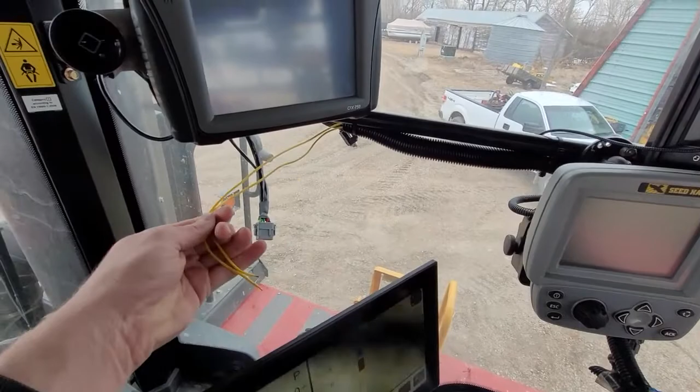Got a little bit ahead of myself - I jumped in before I started filming, but haven't really changed much. All I did was run essentially 20 gauge, 18 gauge wires through my umbilical, and they're going to spit out this side.

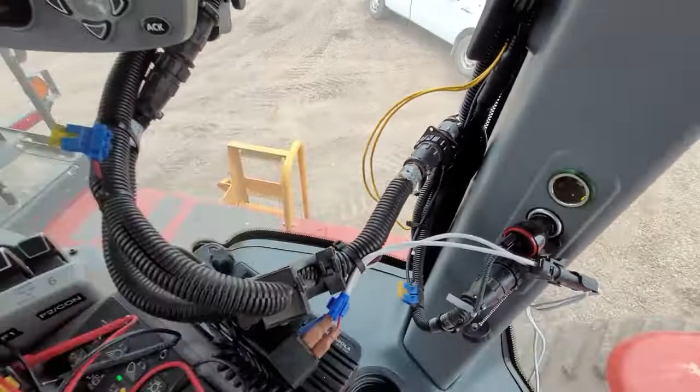And I tested this relay. So this cord off of our loop controller is SH number 322702. That's the cord. I'm guessing all of them have this relay. And what you need to know is I can't go direct off the relay because it sends signal back.

But I tied into the powers on this relay, and if I turn it on, so this is hot, this is cold, or vice versa, I can't remember.

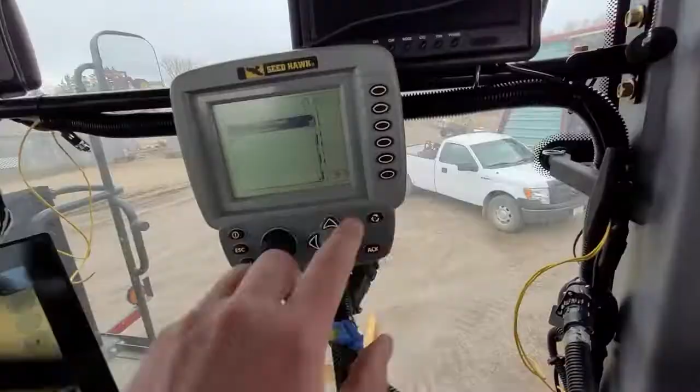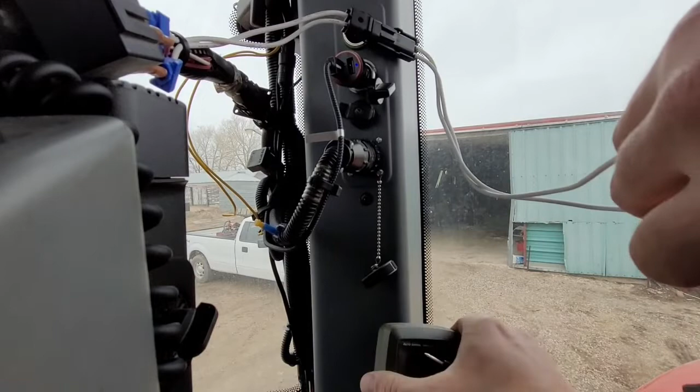But what I will show you, let's see if I can find a spot to mount my camera. It's not going to find any sensors right now, so that tells you whether the clutches are enabled or not. So as it stands right now, the clutch is off, and these two have no power. Let's see if I can put that where you can see that too.

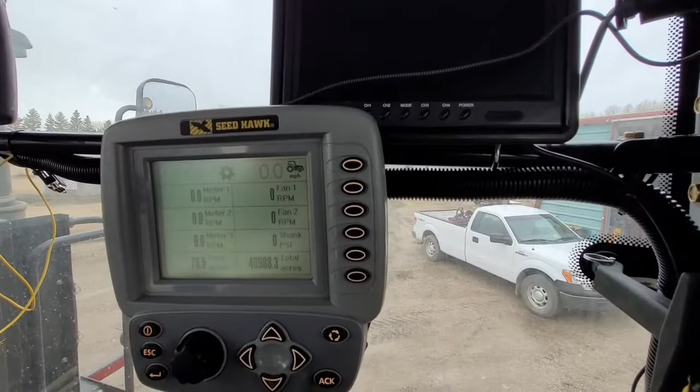Stay. And these two will have voltage across them. Don't really care which way it goes. You can see 11.15 volts across. Don't really care if it's positive or negative, just I need it to act like a switch. So it does. Turn that off, turn that off.

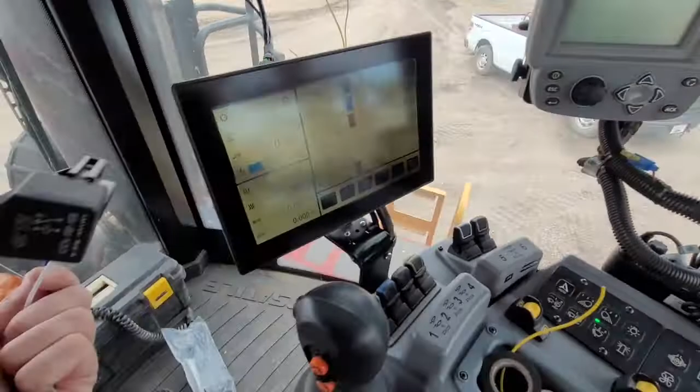Cool, so now we're going to run - I need to have a break right there, so I wired in this little quick connect. It's going to run all the way to the other end, where it's going to plug into this relay, which will act as a button.

So just showing you a quick little run. It's going to go up there and connect, but I just took the extension out, and I just wanted to make sure that this relay was rigged in correctly.

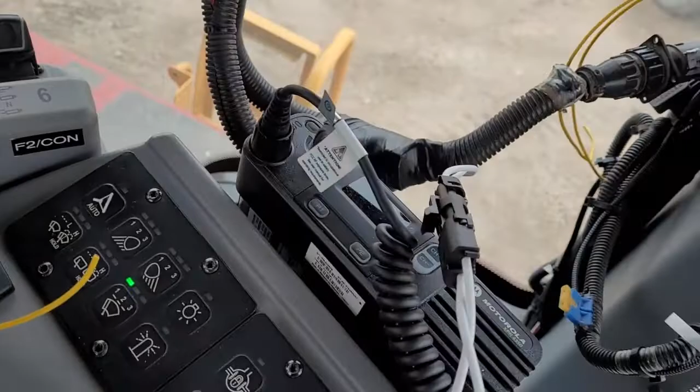So I've got my power going to the two sides - sorry, these two sides, the white and the black. So power coming from the other umbilical. And as you can see, the clutch is off right now.

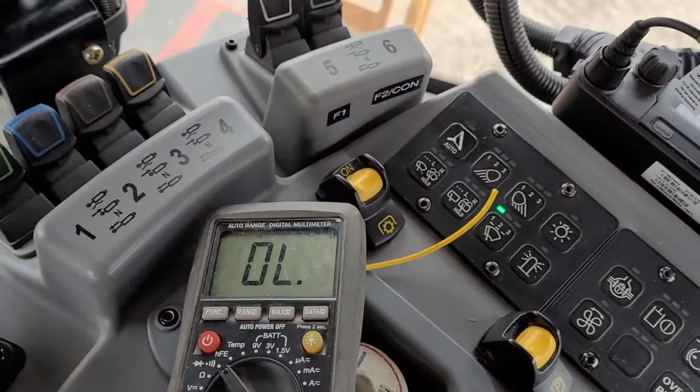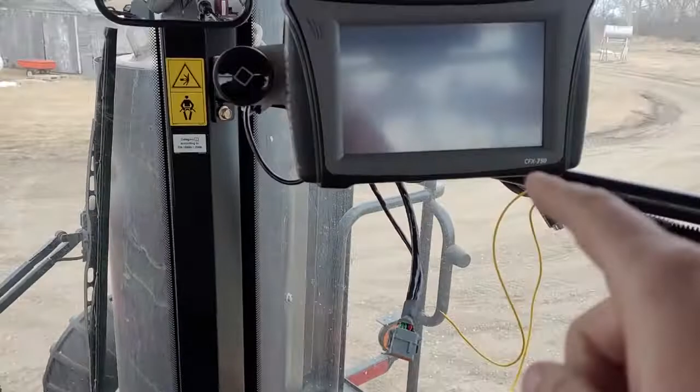So I've got my multimeter on continuity, and then if I hit and engage my clutches, my multimeter starts speaking to me. So that's essentially like I'm pressing a button down, which is what's going to make that guy paint, which is going to make the climate field view log data.

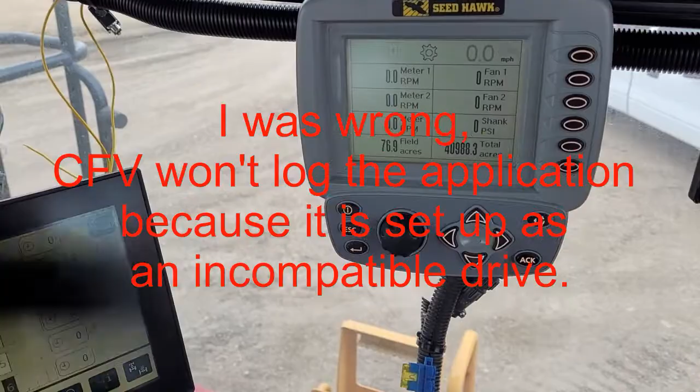Perfect. So on the A side, or A port of our CFX 750, we had a single wire going in. I'm not 100% sure what it is or what it controls, but if you can see, it's on number 2.

And these Deutsch connectors are actually super easy to undo. So you go to the input side, it normally sits in, and all you got to do is put a pair of needle nose in and just yank that out. And then you will see, I've actually got this one open.

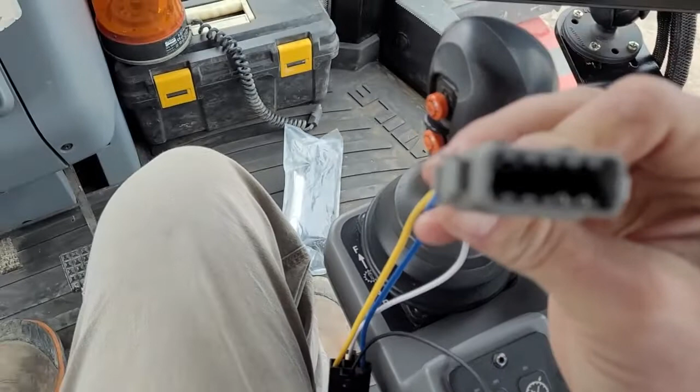Where are we? This is my new add-on that I'm going to have to program. Come on, focus - really hard working with one hand here.

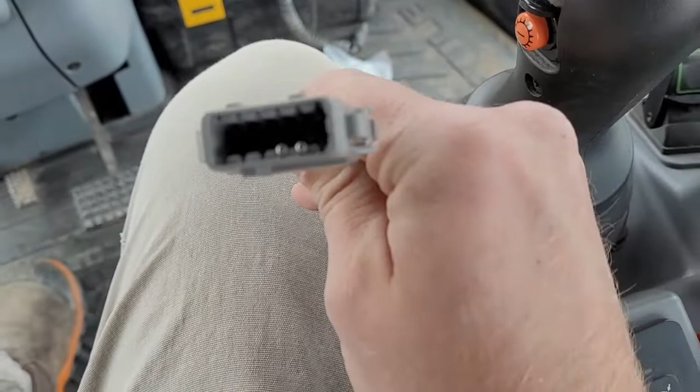But all you got to do is reach in there with a small screwdriver and pry open a tab, then pull on the wire, and it pops out like nothing. And to put it in, all you got to do is make sure you get a little bit of angle on those pins when you slide them in, and push them in until they click.

I'm lucky because I had this made for me beforehand. Otherwise, you need a special crimping tool for these Deutsch connectors.

All right, so we're out here, I'm testing some. I just set up a fake implement, obviously not towing anything, just to make sure that I didn't plug anything into the GPS incorrectly. Now, the one thing, suddenly, I don't know why, it may have been tweaking a feature or something that I don't remember in the fall when I was pulling the disc.

Is that it's not painting yellow when the auto steer is engaged. So I think I may have turned that off, which is fine. So everything's working. So now I'm going to go into the next step, which is to set up my virtual switch.

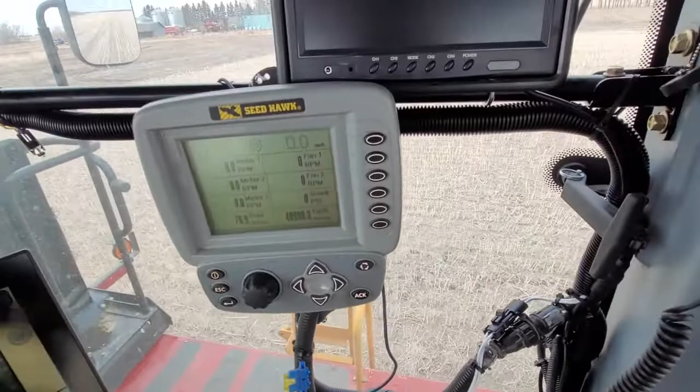Which is connected to the Seed Hawk loop controller. I'm going to turn around. And what I want it to do is to paint yellow when I'm applying product.

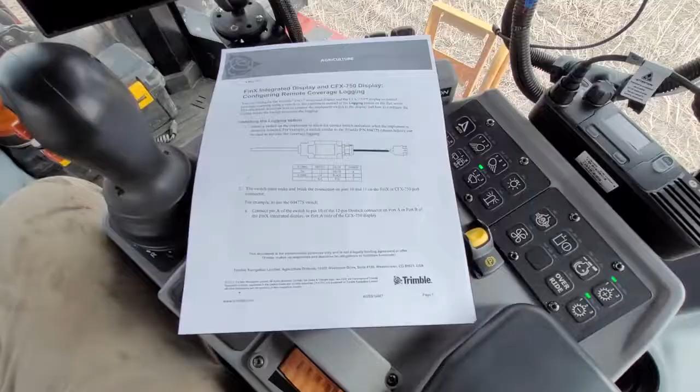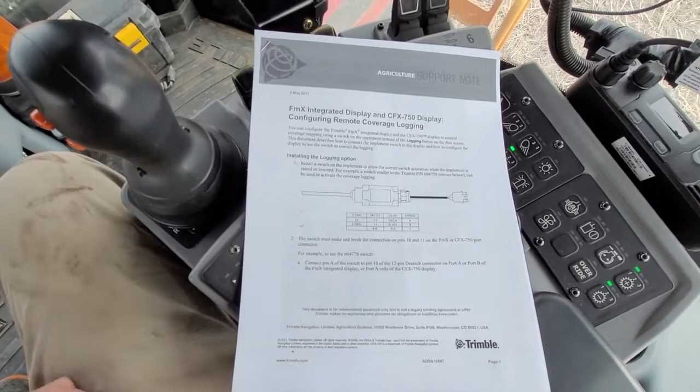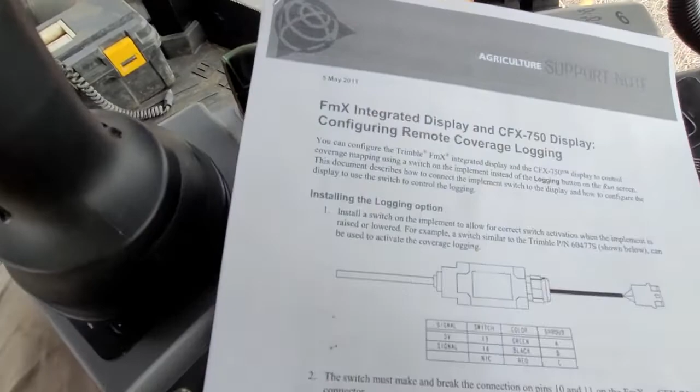Air quotes. So Zach from Canada West Harvest Center in Saskatoon, he's one of the Trimble tech support guys for Canada - at least that's where their website directed me. And he told me what I need to do, and he sent me this printout. So we're going to do the setup according to this. And this is actually a bulletin.

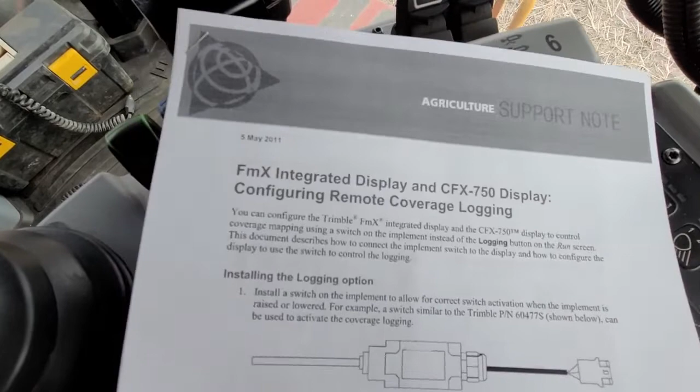It's not in the manual, but it is a May 5th ag support note: FMX integrated display and CFX display configuring remote coverage logging. So if you're looking for this, that's probably what you're going to have to Google or search for on the Trimble site.

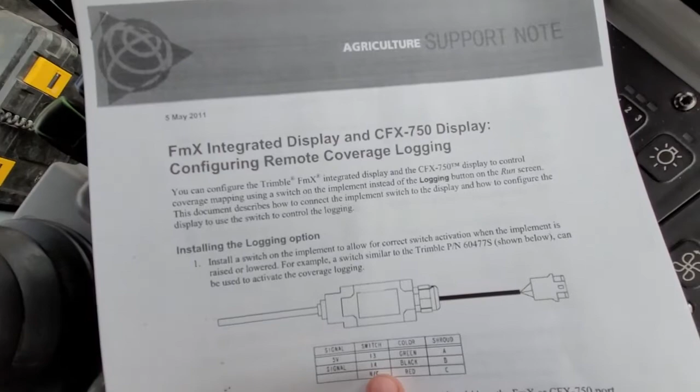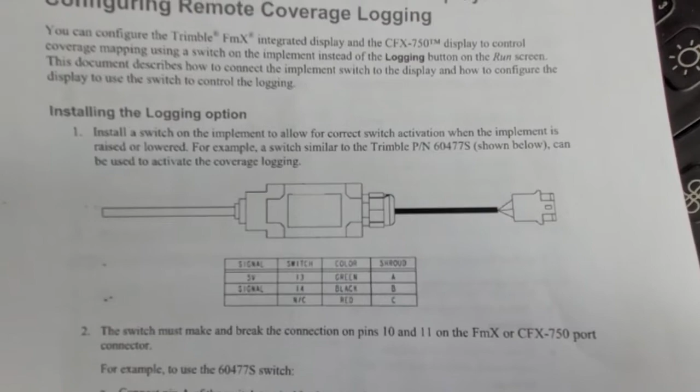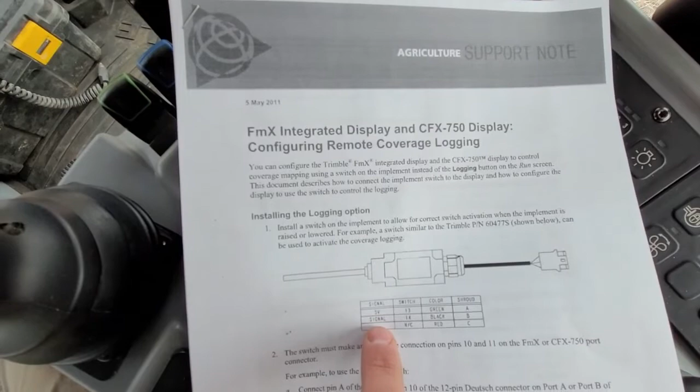First step, install a switch. One thing that kind of worries me is it shows this one in particular - a Trimble 60477S. I don't know what that is, I don't have that switch. But the one thing I saw is it's got a 5 volt and a signal and a blank. I'm hoping that it doesn't need voltage.

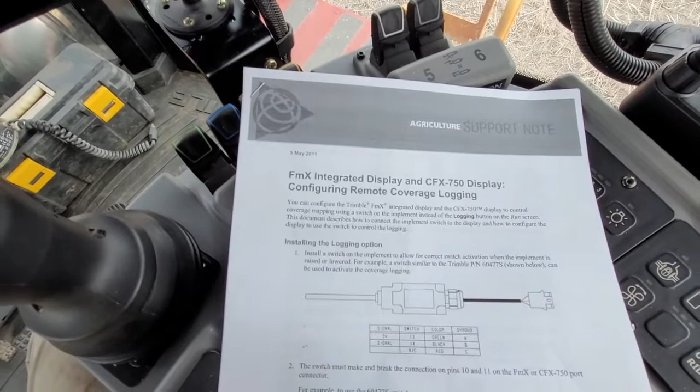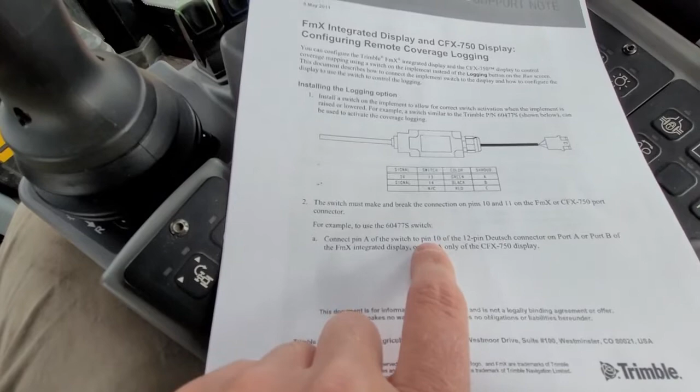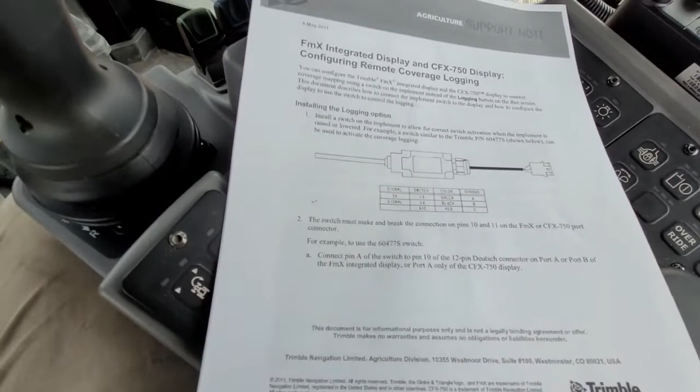It shouldn't need it to operate as a switch. But what I've done is connected pin A of the switch - well, I don't know, and that's where it gets questionable. I have mine in pins 10 and 11 like it says here, but I don't have voltage, mine is just a continuity. So let's see what happens. It's hooked up exactly as I said here. I'm really hoping this works.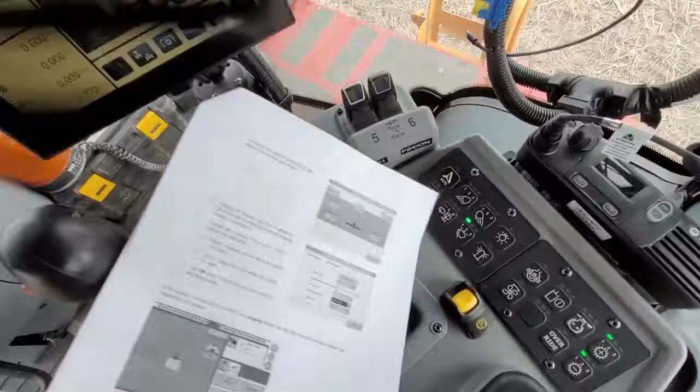So configuring the FMX integrated display - I don't have that, I'm guessing they're the same. Oh, nope, there's one on the back here. Configuring the CFX 750: tap the wrench icon, in settings tap guidance, tap coverage settings, coverage logging, go to - I think it says - tap switch.

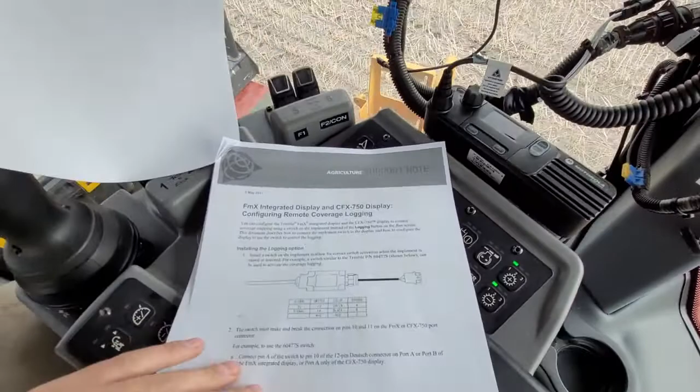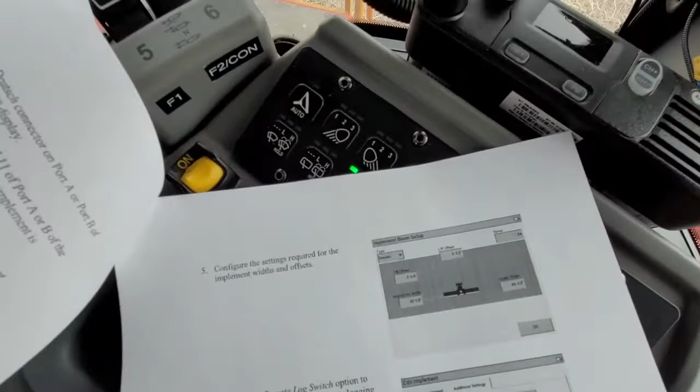I don't have a delay in there, I might have to put a delay in. I probably will, that might be tricky. But on the final page of the FMX, I recall it saying the high and the low, so change logging when selected - so active, let's read this out. High: logging occurs when the circuit is closed, and I think that's what the case is going to be the way I've got it set up. So I'm going to change that to active high, and we'll see what happens. And then we'll back out. Let's cross our fingers and hope I did this right.

First of all, let's get on our line - I was on this line before. This one over on the blue, or now it's our selected line. So first things first, we are not logging when the auto steer is on, which is perfect.

Now, cross our fingers, I'm going to fire up the clutch, or simulate that. And if you can see, it is working. That's awesome. Now I'm gonna go offline and make sure it's still applying. It sure looks like it. I've got just a fake implement set up, and I put a long drawbar on just because, but it sure seems to be working. I'm gonna catch another line here just in case it wants to shut itself off, but I think we've got everything going here, guys.

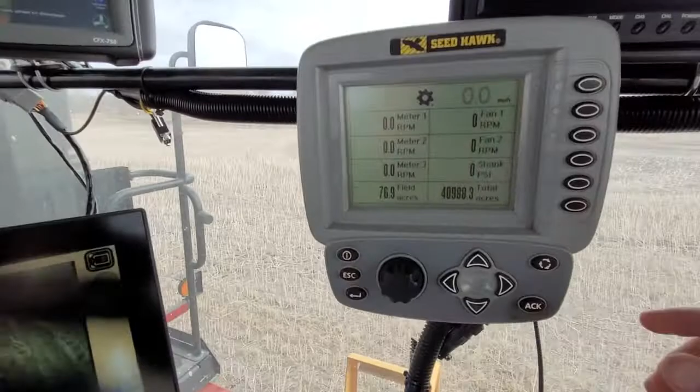I got a hugely long drawbar, but it's working. So if I shut off the clutch, it stops recording. If I turn it back on, it starts recording. Oh, I'm happy with that.

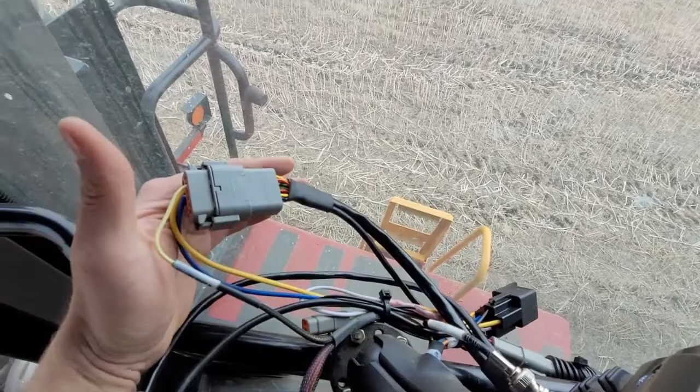All right, so I went and hooked up the Climate FieldView, this cable. As soon as I did that, I got an error, and I haven't programmed anything because I want to do this step by step. I haven't changed any of the settings, but as soon as everything was working, I shut everything off and plugged it in, powered everything back up, and I get an error that says direction - I'm guessing estimated, not initialized or established. I'm hoping that goes away once I do the programming setup here. But I'm just going to stop recording for a second, take a picture so I've got that, and then I'll get back to it.

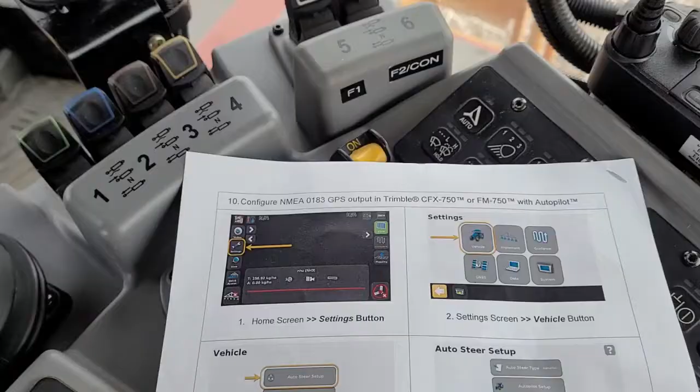Alright, so as it says: home screen settings, which is the wrench. Come here, why aren't you selecting? There - vehicle, auto steer setup, then I go to advanced settings, NMEA output.

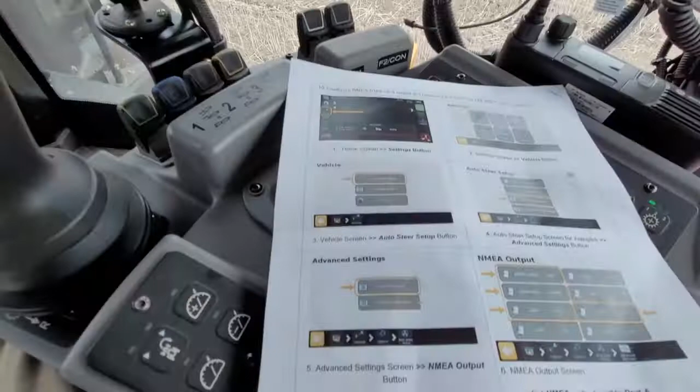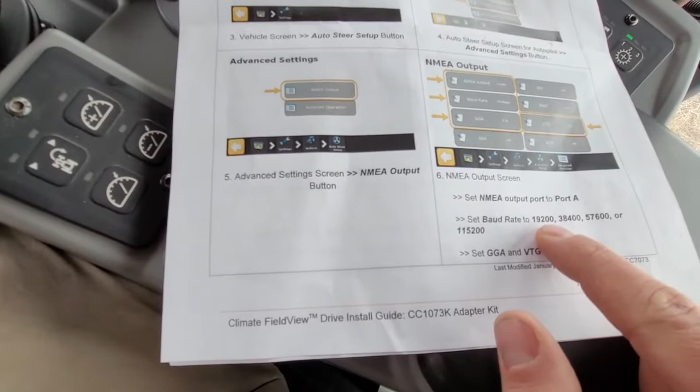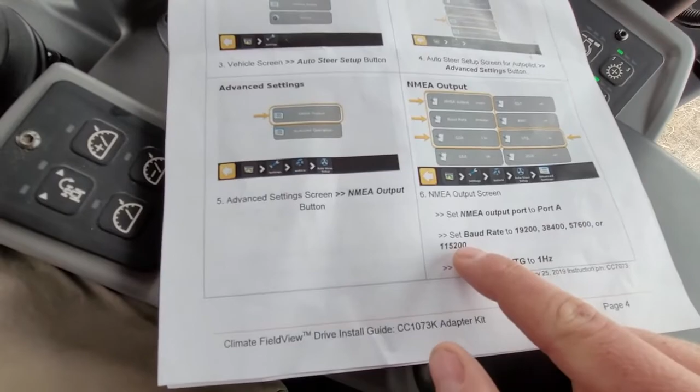I need to enable that. I need to set the baud rate. Where am I? So we're down here, it says 19,200, or sorry, 38,400. So just multiples of 19,200 by the look of it, because that's times 1, times 2, times 3 - or that'd be times 6, I'm guessing. So let's do the lowest one, which is double what we were set at.

I don't know if that's got anything to do with it. The GGA needs to be set at 1 hertz, and the VTG also to 1 hertz. That's it, apparently. Now let's see what happens. Still says direction not established, that's concerning. But maybe it was something I did wrong off the get-go where I didn't get - oh yeah, see, it went away.

Now, before I hook anything up and link whatnot, just going to confirm everything's still working. Speed up a little bit. The ground's still pretty hard, so it's a bit shaky, but it's a smooth ride in the cab, just noisy as usual. So, as you can see, the auto steer is following just as it should.

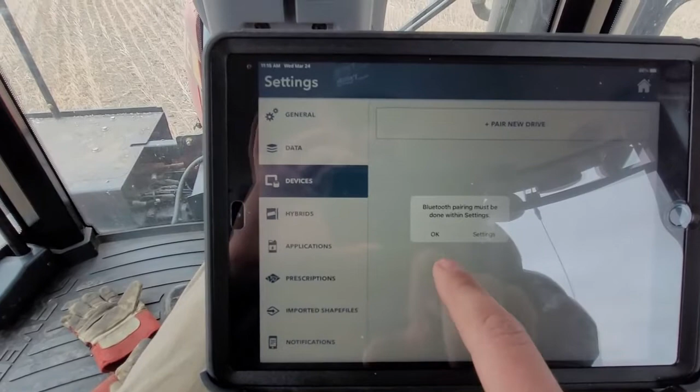All right, we're going to go into the Cab app, go to devices, and pair a new drive. Bluetooth pairing must be done within settings, so let's go to settings, then Bluetooth, and we're looking for drive E07. There's E07 and a whole bunch of others, so I'm guessing that's the one, since that's the only drive in here. So we're connected.

The only other Bluetooth might be the radio, but that shows up as... oh geez, I can't even remember.

So let's go back to the FieldView cab app, and it says we're paired. Let's tap to connect. I'm just going to give this a short name, so Drive 01. I think I'll put a label on it at home, a tab that says Drive 01, and probably put Drive 01 on the bottom of the iPad too, so we know which one it's paired to and we're not cross-talking.

Next. Right now it is on the 610 Delta track, and I'm going to pull the fake disc. Next, it says you've added a new drive, in case of loss.

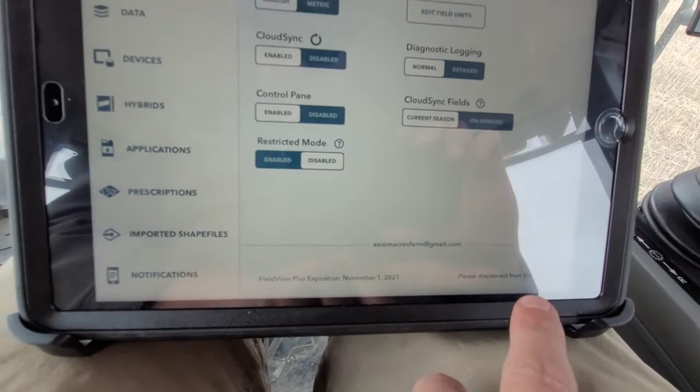All right, so it says we're paired, and remember, if it's solid blue, it means you're paired. Everything's good there. It says please disconnect from drive, but we want to stay connected to the drive.

So let's go home—aha, that's where we needed to be. Let's go to map. This is kind of cool because it already identified everything. It says I'm not tilling, so this is what I wanted to get rid of. We could have manually tapped it, but that would have gotten old after about 10 minutes.

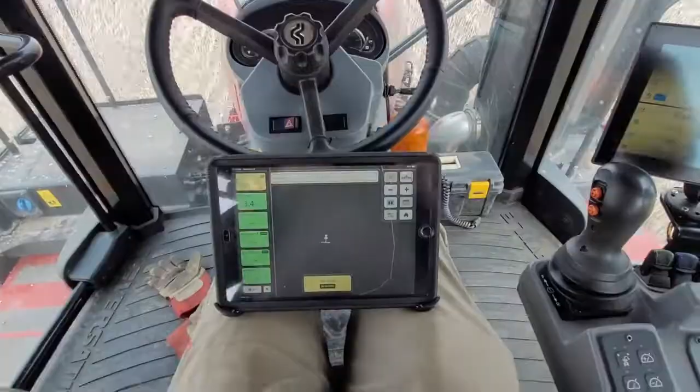So now I am going to do a lap here because I'm pointed in the wrong direction. We've got auto steer enabled. Let's see what happens when I push, when I start the clutch.

All right, so we are reading the right ground speed. There's a couple possibilities that I haven't set up things correctly, so let's just stop this.

I just wonder if I tap it—oh yeah, see, I'm not in an active field. That was me, that was my bad. That's kind of what I was thinking.

So, select field. We are—I think it's saved as Home. Who are we under? This is Lyle, so Lyle Home is what it is. Yes.

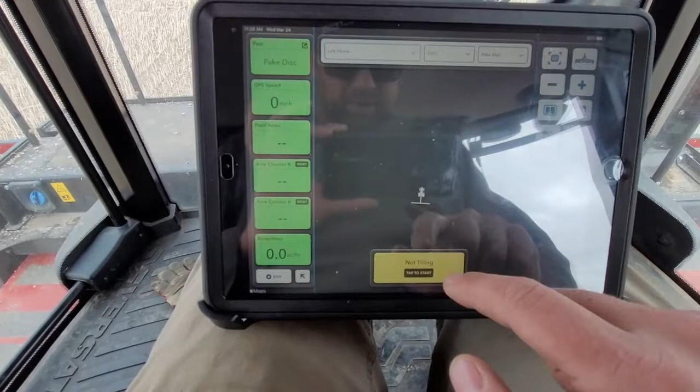Okay, so I just pass name Fake Disc—I'm just doing that so I can delete it later. Everything else looks good. Let's try it again, so let's get moving again.

Well, I think I may have misspoken. I'm waiting on the Climate FieldView guy to get back to me. But doing some internet research, I noticed—you can see I was really playing around—and the Trimble is working right, exactly as I hoped it would.

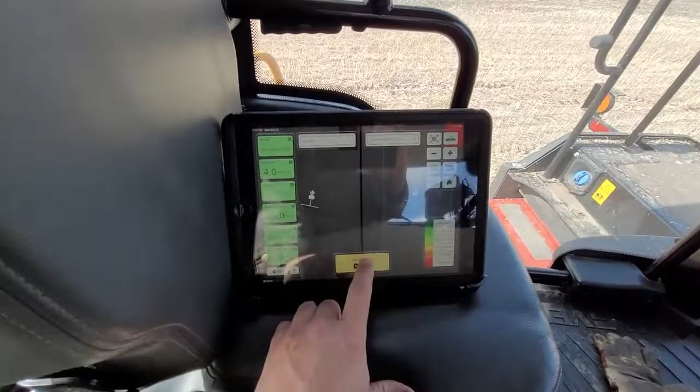So like now it's applying, but down here it's not. You actually have to hit the button to start. It isn't the worst thing in the world, because I was reading online that it acts like you've got perfect sectional control and everything.

So you'll just have to update your rates, which we knew we would have to, but it won't auto-paint like this guy will. You can see the mess I've got going because I've been over this 4 or 5 times. But yeah, that's kind of where I'm a little bit disappointed.

It's not like every time you get to the headland you have to turn it off—it'll automatically do that for you, so it's not the worst thing in the world. You just have to remember to hit it when you start, turn it off when you stop, or when you go to run across the field. It's very minor, but I was hoping for a bit better.

Maybe I shouldn't even say better—it's going to be good data, it's just not going to be perfect. That could partially be me to blame because of how I understood it, or maybe how I hoped it would work. But overall, I still think it's going to be a great platform.

Trying to go around that—that was a bit softer than I thought it was going to be this time of year. So I'll shut that off.